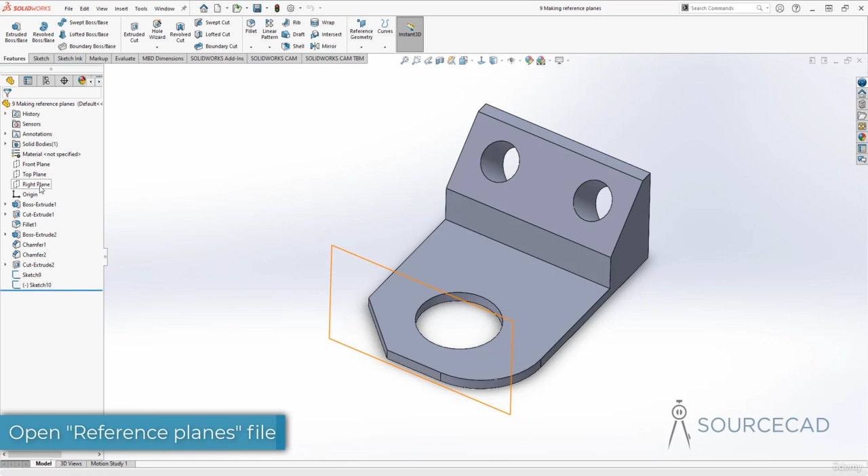So now let's talk about reference planes. There are three default planes available in SolidWorks: front plane, top plane, and right plane. Apart from that, you can also use the planes of any feature or part to start a new drawing. But if you want your own reference plane, you can create it using this reference plane feature.

On the features tab, we have the plane option right here. So select this plane option, and now we'll learn about creating a few reference planes.

The first one is a simple offset plane. So here I'll select just any plane from this part, and here we are. It will automatically create a plane which is at a certain distance from this selected plane. In this case, it just created this one at a distance of 10 mm.

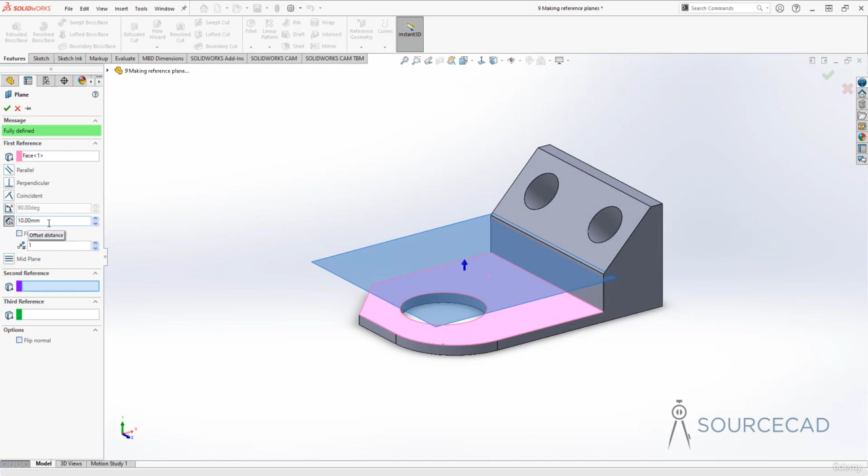If you want to change that distance, you can either click here or add a number. Also, if you want to change its direction, click this flip offset and it's going to make this plane appear below the selected plane. That's how you create a reference plane, and then using this plane you can create another sketch geometry.

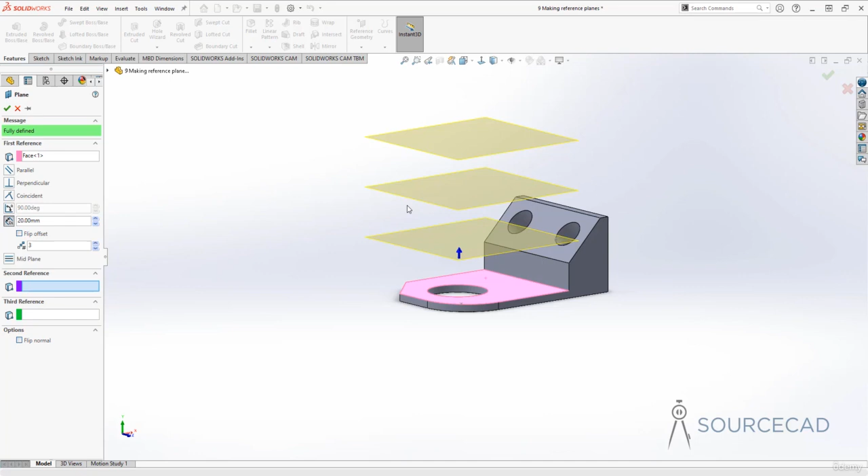Now I'll uncheck this flip offset, and here you can add more planes. All of these planes are now added at an offset distance of 20 mm, so every single plane has a gap of 20 mm. Once you're satisfied, just click OK, and we now have three reference planes which you can use.

These planes are also added to the feature tree here, so you can see we now have plane 1, 2, and 3. Just in case you don't want a plane, you can select it and delete it from this list. For example, here I've got plane 2 and 3 selected. I'll delete them both and only leave plane 1.

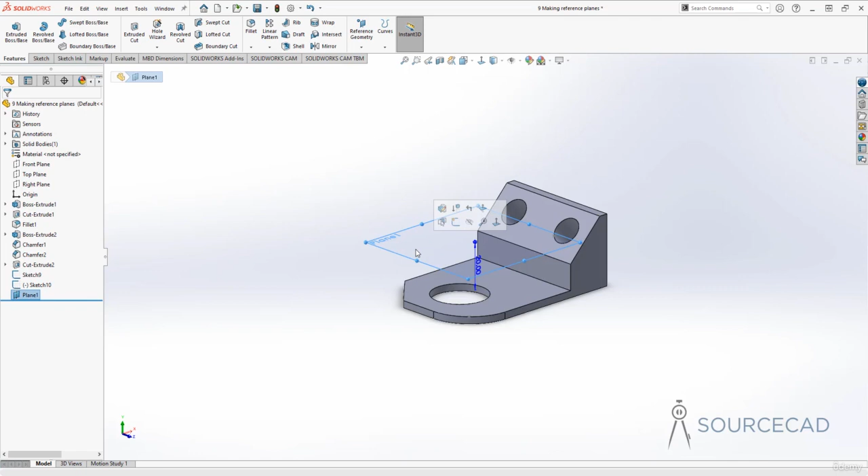Also, if you want to change the size of this plane, you can do so using these grips. Just grab these grips and move them around, and that's going to let you change the size of the plane. However, changing the size of the plane does nothing in this case because the planes are infinite in nature, though it may look like it's expanding only up to this much of the boundary, but that's not the case.

You can select a plane, go to sketch, and now you can draw even outside this plane's visible boundary. It will still make everything right on this selected plane. So even though the boundary ends here, you can sketch anywhere you want on this plane after selecting it. I'm going to select plane 1 and the sketch, right click, and delete it.

Now let's see the second one. Go to features, reference geometry, plane. In this case, we'll make a plane using two planes as reference. I'm going to select this one as the first plane, and then select this plane as well. Automatically SolidWorks will figure out what kind of plane we want.

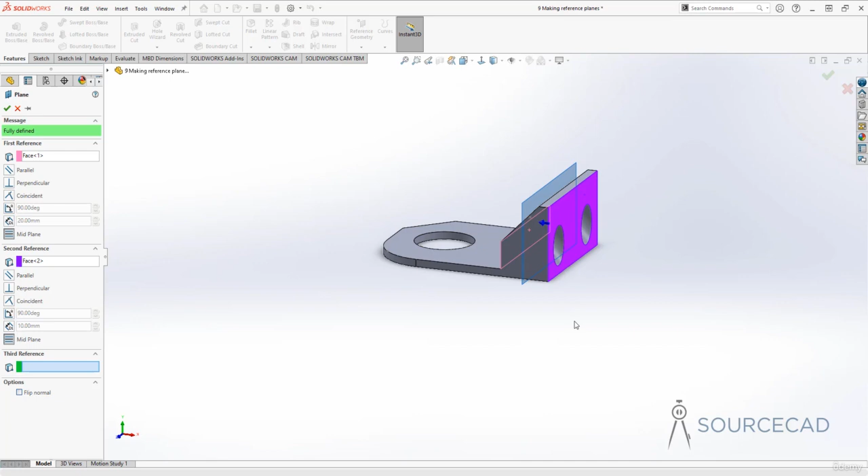In this case it will add a mid plane which is exactly in between these two planes. Since both of these planes were parallel, it will add this plane right in between the two. Now click OK to accept this, and here we are, we've got the plane.

If, however, you select intersecting planes, then you'll get this. So go to plane, and I'll select this one as the first plane and this one as the second plane. Now we have this plane exactly at the angle bisector.

If you increase the size here, make it bigger, and this plane also, then at some point they are going to intersect, and if you divide it into equal angles, this is the plane you are going to get, where both of the angles on the left and right side of the plane will be equal with respect to the selected planes.

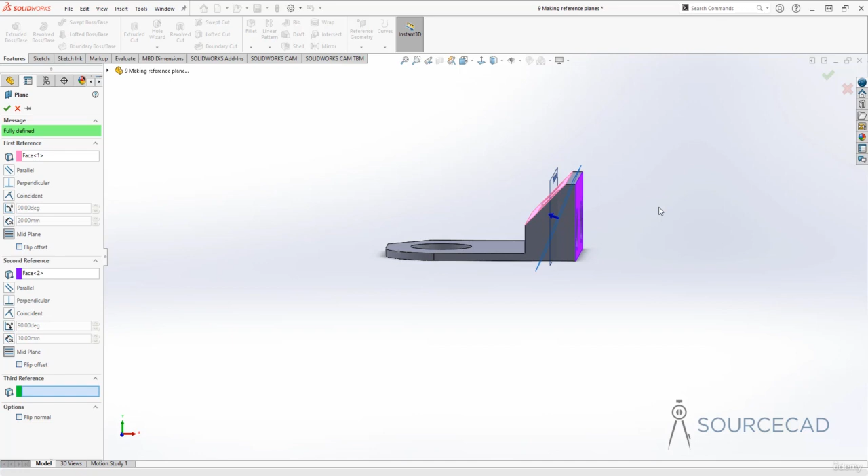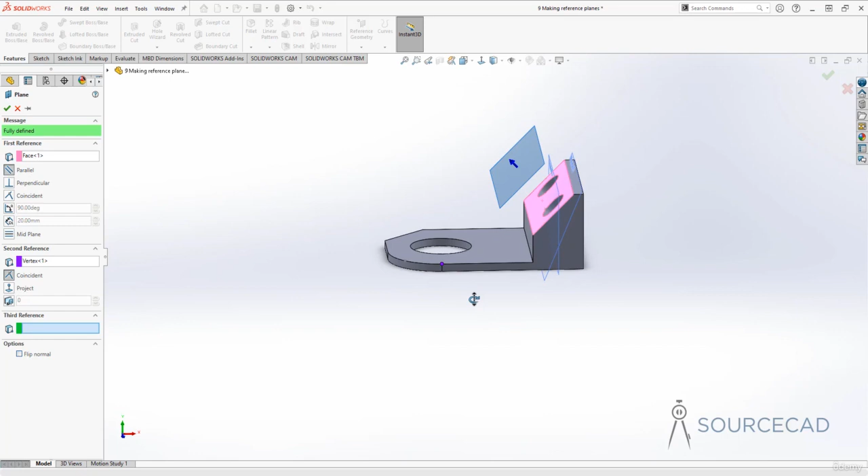I'll click OK, and now let's see the third type of plane. Here we'll make a plane using a reference plane and a point. Let's go to reference geometry, and I'm going to select this plane here, and for the point I'll select this one right here. So we now have a plane which is parallel to this selected reference plane, and this plane will also pass exactly through this point. From this perspective you can see that as well.

Look at this, this plane will pass exactly through this point, and it's also parallel to this selected plane. So that's how you can make a plane with two different references, like a plane and a point.

Now you can also make a plane tangent to these kind of circular surfaces. I'll go to reference geometry and select plane, and I'll select this fillet surface right here. So here we have got a plane which is exactly along this plane. It's not that useful because we can obviously just select this plane and make our sketches, but...

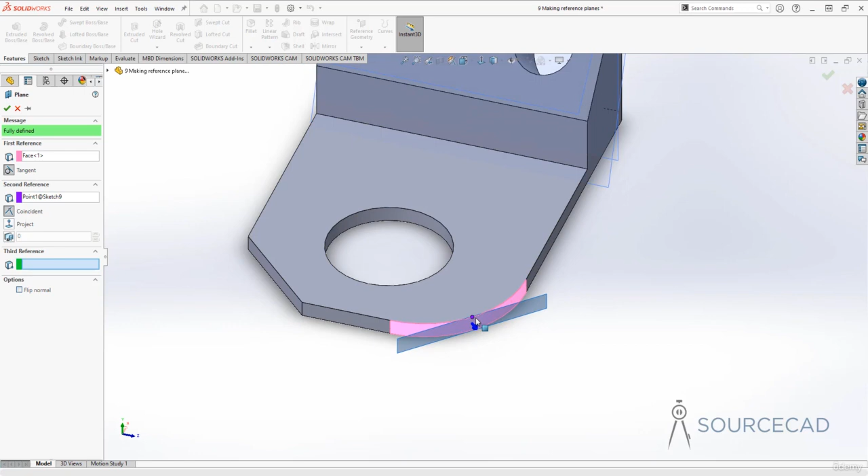If you already have a reference point along these kind of circular surfaces, then you can select that point. For example, in this case, I've already created a point, so I'll select this, and now we have a plane which is exactly tangent to our selected surface here, and also exactly at the selected point. So it's the point of tangency for this plane. After finishing this, you can make your sketch right on this plane.

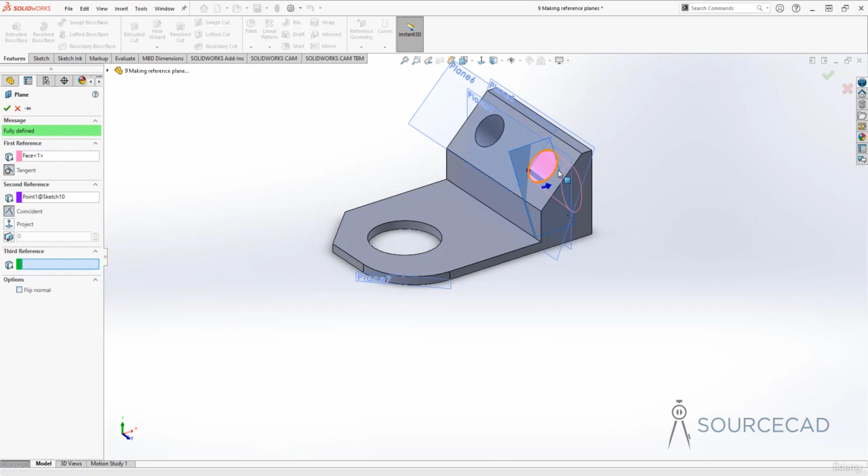Similarly, you can make a plane on these kind of surfaces as well. So here also we have the surface, select this, and here we are, we've got the plane which is tangent to this. You can also select a point now, and it is tangent to this cylindrical shape, and also tangent exactly at this point. There we are, we've got a plane which is tangent.

Now let's delete all of these planes that we created. I'll shift-select all of these, and I'm going to delete all of these planes.

Now the next type of plane which we are going to discuss is a 3-point plane. I'll go to reference geometry, plane, and now I'm going to just select 3 points from this drawing. I'll select this vertex, then maybe this one, and we'll select this last vertex. Here we are, we've got a plane which will pass through all the selected vertices, and this is the plane. Now let's just get rid of this one.

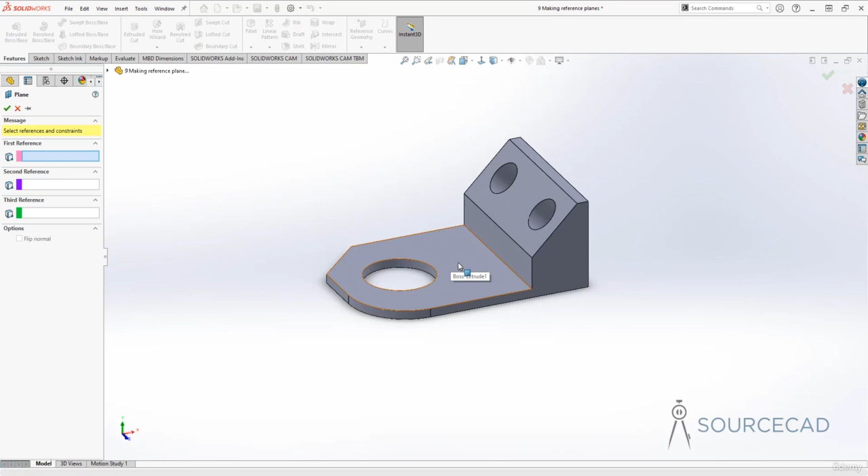Let's see the next one. Now in this case, I will select a plane and an edge. So here, let's just select this plane, and for the edge, I'm going to select this one. Now we have a plane here which is made with reference to a selected plane and edge.

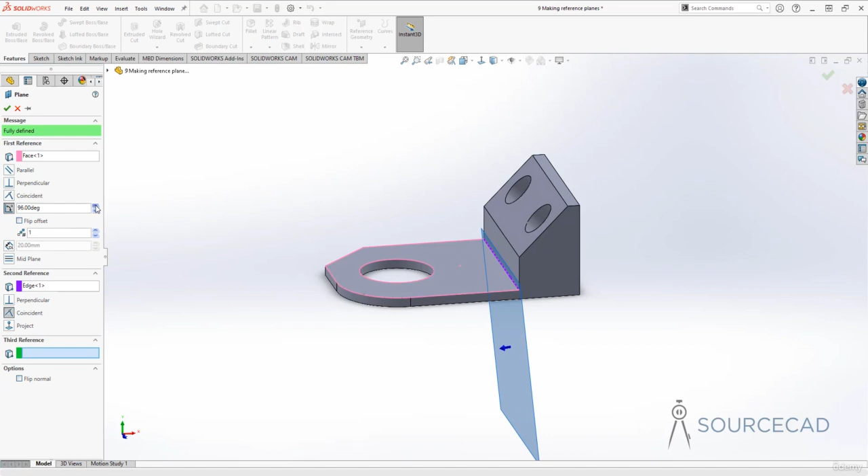In this case, it is actually along this kind of plane, but you can change its angle. Let's do that. I'll go to this angle option here, and now I'll add an angle, and here we are. So now you can change the angle of this plane. Right along this edge, it is changing angle with respect to our selected plane. You can also flip this direction, and here we are. Now its direction is flipped, but it's still measuring the angle with respect to our selected plane.

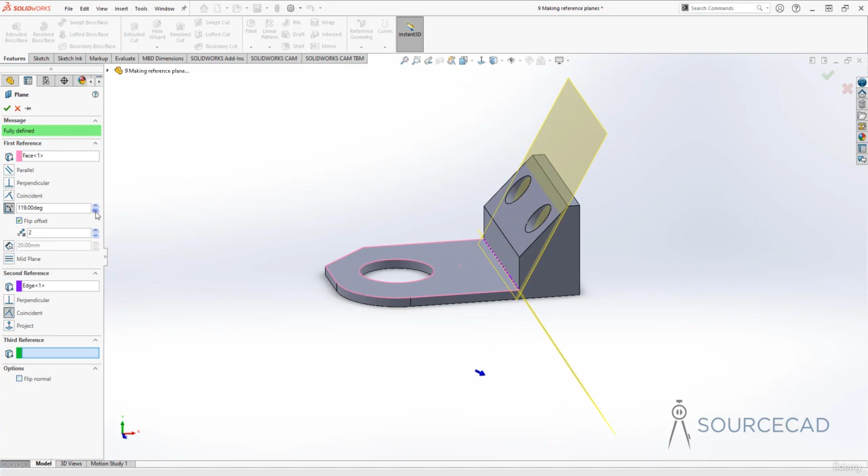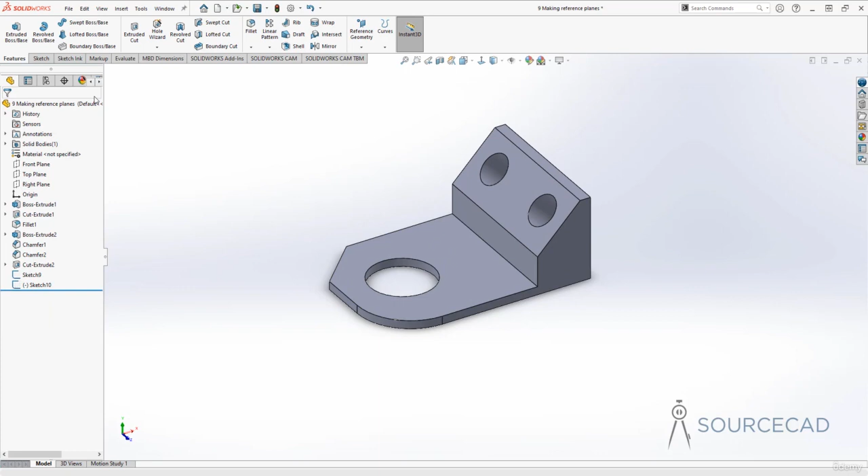Now finally, let's use a sketch to make a plane. I'm just going to delete all of these planes, and here I'll go to sketch, and maybe I'll start from this plane here, and add a simple spline like this. All right, let's exit this sketch.

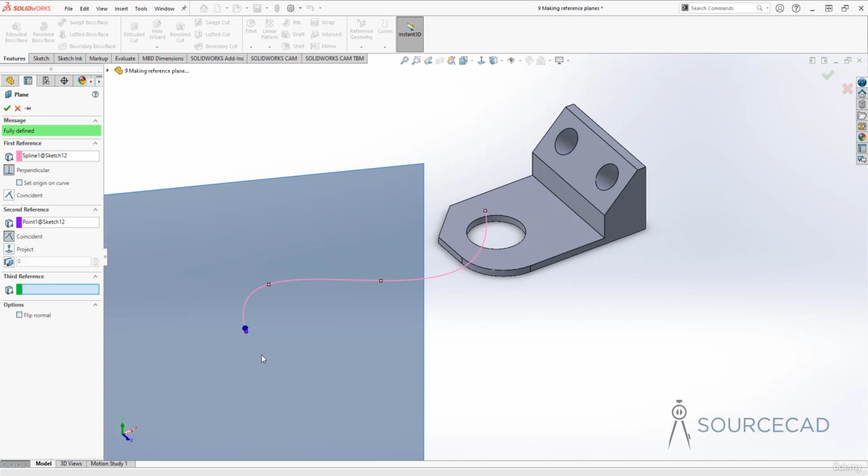We have this spline. Now using this spline as a reference, you can also make a plane. I'll go to feature, to reference geometry, plane, and I'll select this sketch. Currently it is making a plane which is exactly the same plane used for creating this spline. Now we'll select a second reference, and for that I'm going to select this endpoint, and here we are, we've got a plane which is exactly perpendicular to this spline at this point.

So you can also choose another point. For example, I'll go to the second reference, and select this point now, and here we are, now it is perpendicular at that point, and maybe here as well. Again, I'll go to second reference and select this point, and there we are. So in this way you can create planes which are perpendicular to a selected sketch.

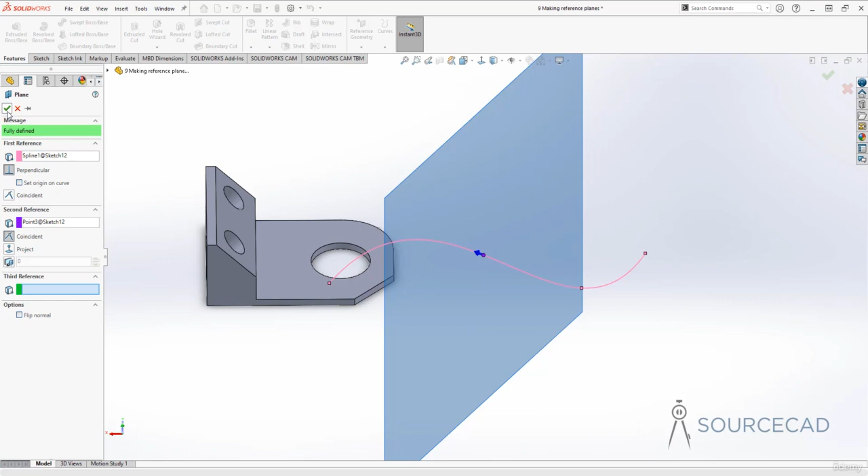And that was all about creating planes in SOLIDWORKS.